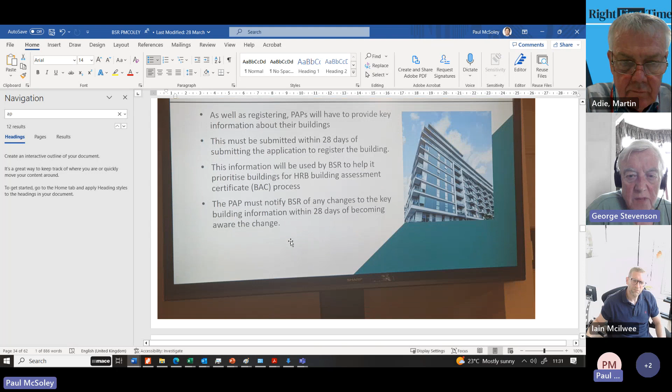Yeah, you may have sent it to me. I must admit, I've not opened that up. There's so much going on, isn't it? It's all a bit confusing.

So the PAP would be an organisation as such, Paul. I would take it, that's what it is. So you might—I'm not sure.

It's like I had a conversation recently—I won't name the person—but my biggest fear is that if you look at the principal design and you go, 'I'm going to give them all of these duties,' no disrespect, I don't mean it in any shape or fashion as wrong, is that they don't have the knowledge of all these different systems, right? So they're not going to spot it. And so the fire engineers don't understand the products, they're not going to spot it. Building control again don't understand, they're not going to spot it. So there's still this kind of risk that all these people are now accountable, but actually who's actually dealing with the risk? That's the bit that frightens me.

Because you see the effects on big projects where you get to the end and you go, there's 7 tiers of hierarchy that has not spotted it, and now it's there. Do you know what I mean? Then you've got to deal with it. It's going to be a hard gig to get it right.

Hold on, my neighbour's dog's just done an entrance into the house, so it must be open. Oh, my camera's off. There's never a dull moment, is there? No, never a dull moment. As I say, look—oh wow! Dog, it's my neighbour's dog. I better take him back. Back in a minute, sorry guys.

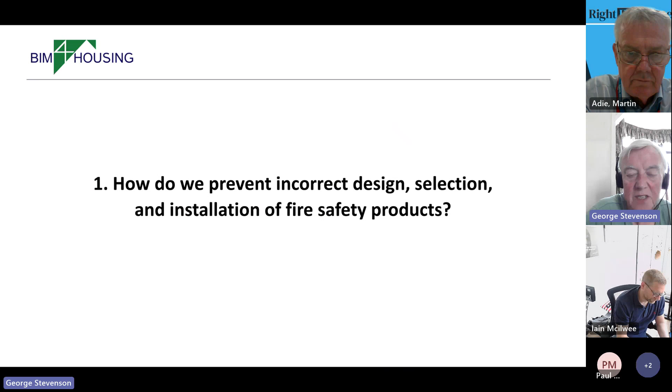So that was the question that I posed, and this was the group that contributed to that.

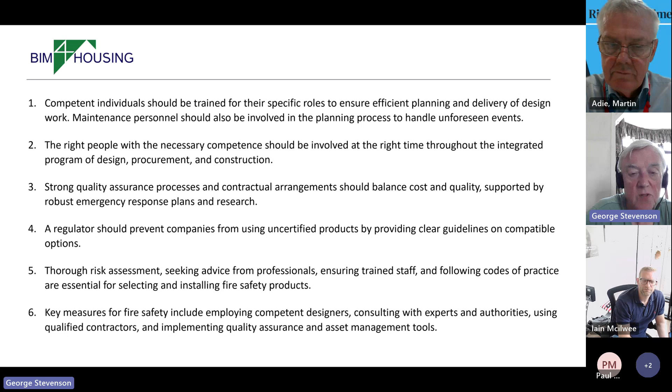And this was the output from a combination of what was said in the round tables, but also we did an online session beforehand as well.

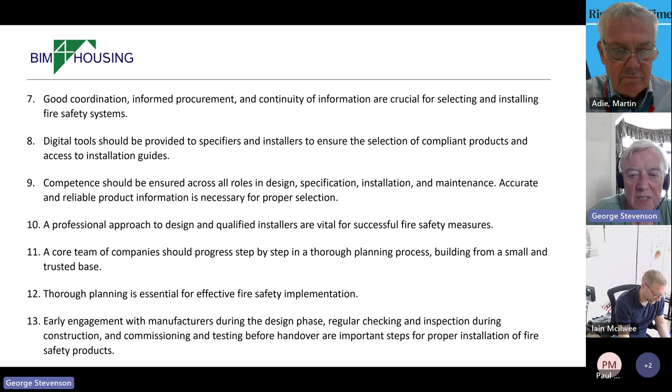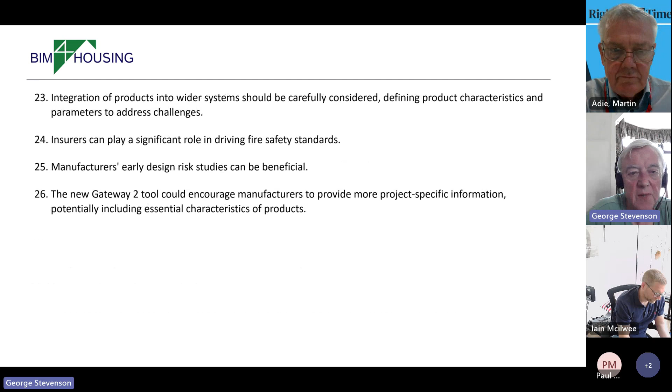So we've got some good examples there. Quite how I turn that into something we can use, I'm not quite sure, but I think we've got some good information there - 26 bullet points there.

Then we had another one, which was how do we ensure that the asset information is managed through the asset lifetime.

I'll just explain why this particular topic came up, and that is that what I've discovered in working through, in particular on the fire safety side of things, is that when people are using...

inspection software like Bolster or Plan Radar, what they're actually doing, it appears, is recording the golden thread as the actual inspection, rather than against an individual asset.

So therefore, in two years' time, when somebody carries out another inspection, even with the same software...

they renumber everything, because it's the inspection that's being paid for, and it's the inspection that's being recorded, rather than the asset.

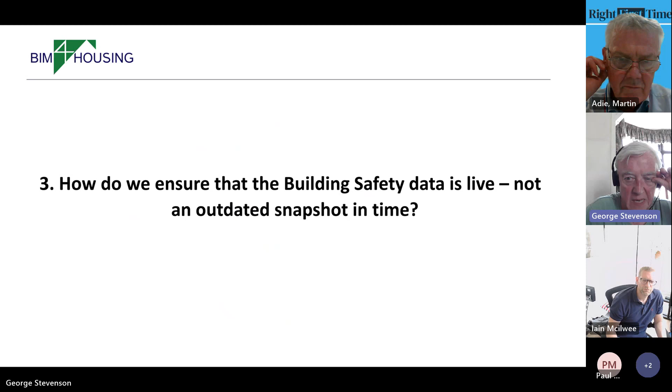Then the building safety data - it shouldn't just be a snapshot in time. So this was the group that were involved in that.

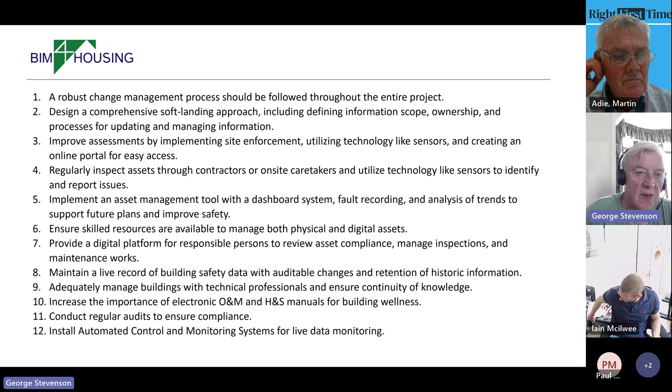And this was the results of the discussions. Wow, so quite a lot of good stuff there.

Now, I think most of these we've not had, Paul, the feedback from the table itself, although Mandeep sent something through this morning. Do you know if anybody was making notes? Yeah, I took my notes and sent them through, and so did— oh, did you? Scott, is it Fletcher Priest? Right, from PRP, yeah, he sent his through as well. So I did mine and he did his because I sent mine over to him as well.

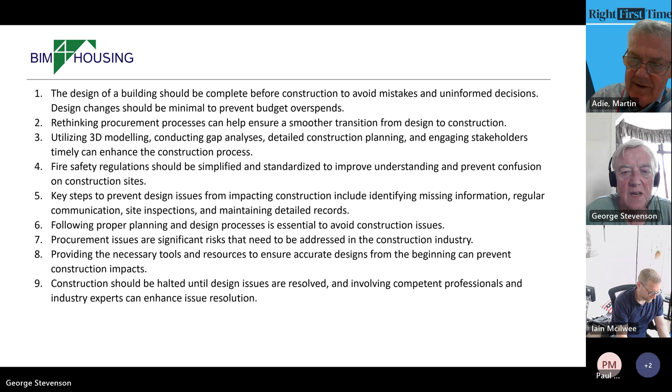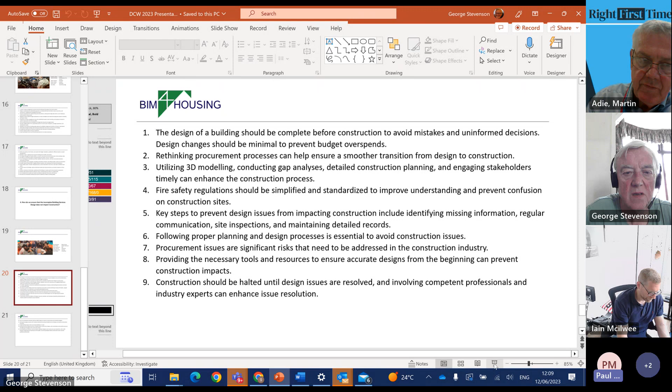I think you've got it there. I think it was quite concise. It's just, isn't it? Let's have a look. Just it was from Scott. Let's have a look. Yeah, Scott Sanderson. Scott sent it to me. Did he not reply? I can't remember.

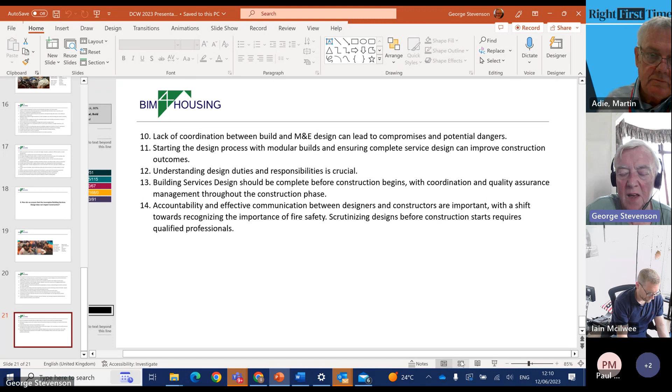Anyway, so Martin, the key thing about that is that what we were trying to do was distill down what information is needed into some topics that we then came up with. So I don't know, do you feel that's been useful?

Anyway, so I think I'll stop sharing now. So I think having some fairly simple questions there that people thought were useful.

So yeah, the answer to the last one is the answer to most things, quite frankly. That's something we're doing as an organisation, and we're getting a lot of fight back from some very good customers, but we are saying you're not ready to a lot of customers at the moment. The days of us jumping in with both feet and starting to dig holes before we're confident that the services are going to fit are behind us. We're not doing that anymore. There's a lot of customers, including the biggest customer of all, who don't like that. When you play that one back at them, they don't like it.

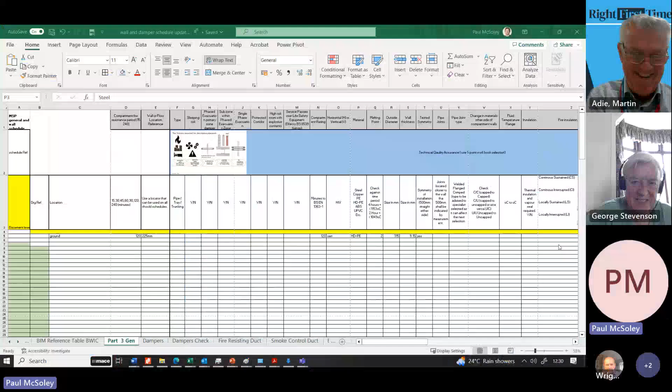You're doing something on doors as well, have you? I've not gone to doors yet. Doors are on my agenda. Funny enough. You're on your to-do list. On my to-do list. No, because I think trying to make complex simpler is the only way to do it. But I need to pick on Douglas for some of this as well.

If you take pipe work, right? This is all the things for one pipe through one wall that you actually need to go to someone like Hilti or Rockwool with to get them to give you the seal type that you need. And you sort of go, that's just pipe work. And it's things such as the jointing method, where that jointing method is in relation to the wall, whether you need continuously sustained insulation for thermal vapours, or whether you can do something locally just for heat transfer. You can't determine that unless you know what the fluid temperatures and the materials are.

It's just impossible. Then you've got to consider is it in the hole with other stuff or not, because the way I've tried to look at it is that if a pipe's doing drainage, it's got a building regulation for how you deal with the drainage in the first instance. That bit's got to be right. Does that make sense? Yeah. Because if you end up with big risers up buildings that are 30 floors, everyone will go, we want cast iron with certain types of joints on it to go down the building. But then they put it in a riser with drywall on all four sides with a hollow floor. There's nothing there.

And you go, well, what are you gonna anchor and bear it against? Well, you can't. So you can't use that. So you've got to use a different system. You might go to a high density plastic like HDPE. But then actually it might be the wall's incorrect. You need a wall there that is solid brick, concrete or block on 2 or 3 sides to get your anchoring as you go down the building. Do you know what I mean?

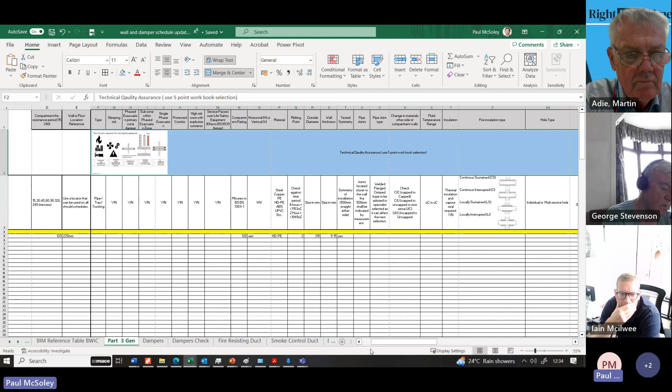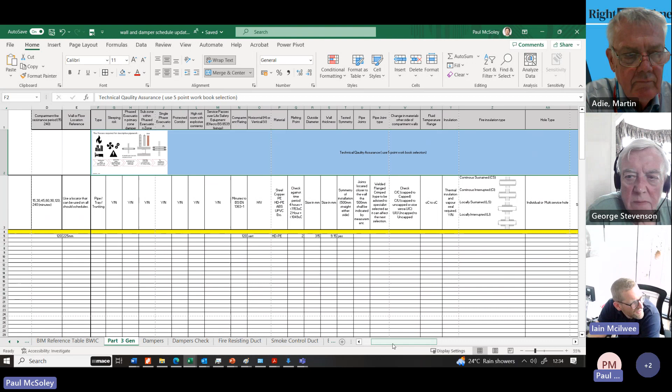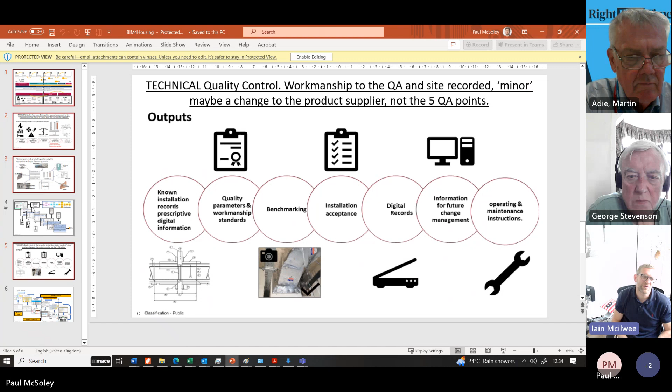Does that make sense? Looking at it in a code, Part B is the last bit you do. You do the first bit first, and you choose the appropriate product to meet the Part B risk at the end. That's how I kind of got it in my brain. Paul, have you done anything to look at this? Because everything is done bespoke every time. It's like every decision has to be made every time almost, doesn't it? Yeah. And that's part of the issue. If you took this to a manufacturing environment, you'd solve these problems once and do it that way repeatedly. Definitely.

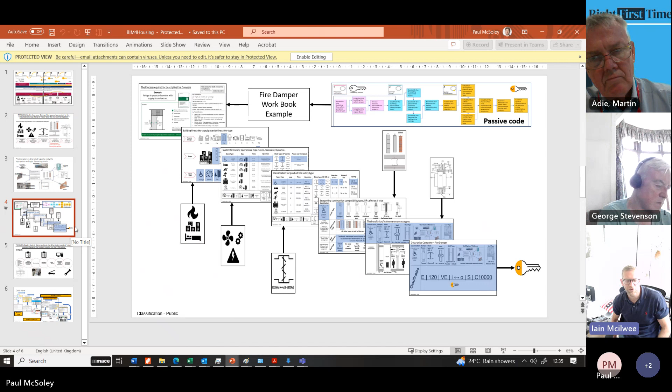That's the big challenge, isn't it? A systemized approach to building starts to assume that you'll make consistent decisions as a business. So main contractors would almost have their preferred method of build. But... I agree. I think the only issue for me is who's in the zoo, isn't it? You've got people doing these who've got their own interests at heart. No disrespect to those people building the walls, people doing all these other things.

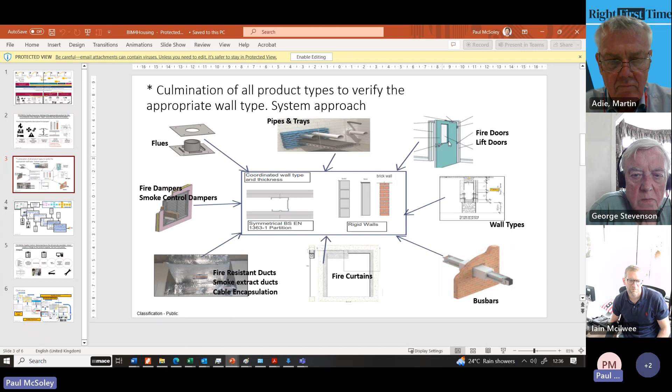They actually don't understand how what they're doing can affect the wall, or how this can affect that via the wall. Because that door might be tested in gypsum, but actually I've got flues involved, need a blockwork wall, and suddenly the door's no good. It's those interrelationships: you've got to get everyone to the point where, before you put that in a wall with all of these components in it, you know what they all need to house them, so you can choose the right wall and the right component to meet all of it. That's the jigsaw puzzle, isn't it? But we rebuild that jigsaw puzzle almost every single time.

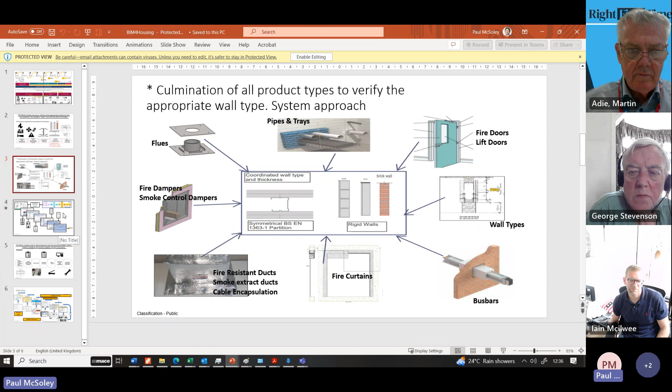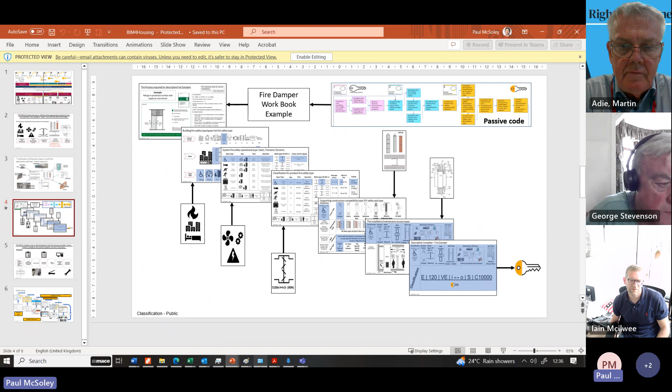We do. I'm not sure you'll ever change that, to be quite honest with you. Maybe with £10 billion and everyone testing every single variant that can ever be built in the world, then maybe you will. But that's a bit in the long grass at the moment. It was just getting the same sort of thing to apply to the others. I'm still working on the others. The pipework one's horrific, because when you start looking at pipework and laying it bare, different materials make a different connection type, which means a different seal type. No one's really looking at it like that. Does that make sense?

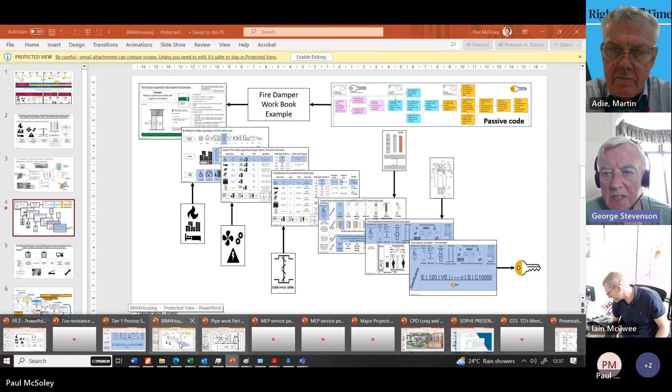Yeah, I suppose really, you might say that the solution to this is MMC, but that doesn't seem to be working, does it? Doesn't help you out with refurb either, does it? No, because you'd have to consider all of this stuff in the prefab before.

If this was modules of rooms, then you've got joint methods where you connect the next room onto it. You end up with this UC connection if you're not careful, if they're not like a welded or a solid steel flange connection. If it's all like push fit, then you are possibly in the UC world. If the seal wasn't tested UC and it's CC, then it's not appropriate. You might have to retest all of those seals to prove the materiality.

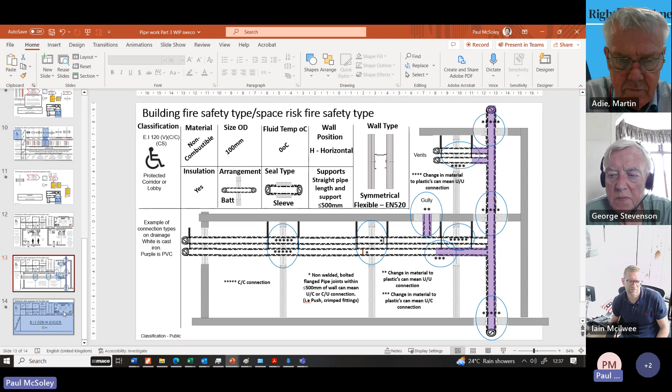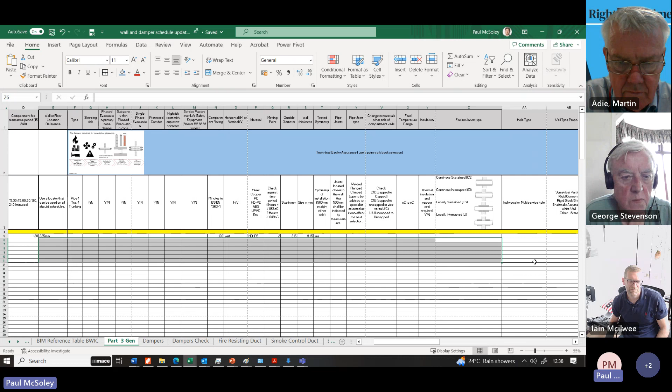It becomes very difficult. So you've got to lay it out, as I've tried to do there, so you could go to Hilti or Rockwool and say, actually, that's what I need for that one condition. Then if you can build them all up by where it's located in a wall, with all the different ones that you've got by that indicator, and you can schedule it out and go, I've got all these different materials, all these different properties in that one wall, then you've got 90%, maybe almost 100% chance of actually getting the right seal for all of those different materials. I can't see how else you're going to do it.

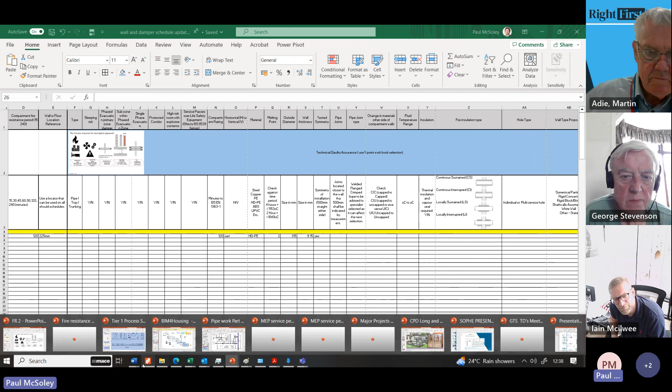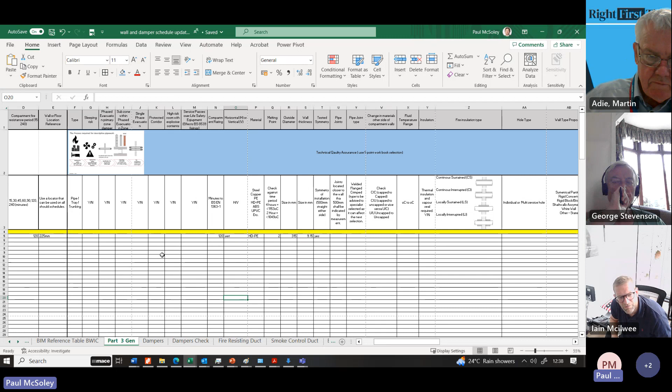And the guy from BASEC gave me, where's it gone? Is it still here? I know I've shut it down. The one from BASEC over cable types is CCA, BCA, all these different cable resistance ratings that you've got for classification and reaction to fire. And they've got acidity, all this other stuff to it. I'd never heard of it. I've been going through it all because I've got to try and schedule that out next in a similar diagram.

So it's really not as simple as I think everyone's trying to make it. You've got to get the complex, then try and break it into a simplistic way for people to understand it. Then, as you said yourself there, Iain, you've then got to get them to pass that information around at the right time. It's a big cultural shock, I think. You know what I mean?

Not one we're going to solve by Friday, is it, Paul? No, it's not. Unfortunately, not this year anyway. Not this week. Not this year. Friday next year, same time.

Yeah, we were doing something last week on carbon. And one of the biggest challenges is most carbon information that's available is on concrete. I know, it's brilliant, isn't it? But most of the things that can actually make a difference are building services. And getting embodied carbon information, for example, on a pump is nigh on impossible. Yeah, it's because it's hard, because you've got a very complex assembly of elements.

We looked at it about 2 years ago, George. You went through it with the guys who were doing TM65. I'm sure you've seen TM65, George. If you haven't, it's a good read. That's about embodied carbon in mechanical and electrical. Whatever figures you do get, there's two assessed methods you can use, or an EPD, and initially they're like rocking horse poo, aren't they? So, EPDs for plant and stuff.